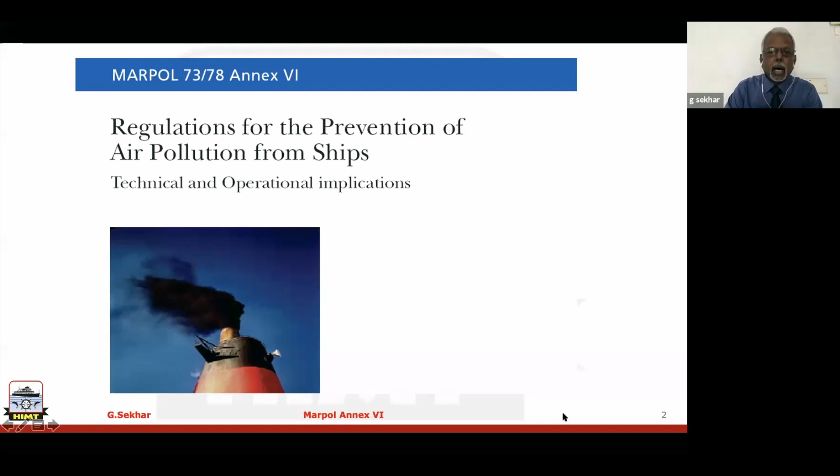But IMO regulations, if you see MARPOL Annex 6, as I have said, the focus is mainly on those issues which are very difficult to solve. For example, look at all these 3 issues, like ozone depletion, global warming, or acid rain. Now, who is responsible and how can we solve this issue? Can you put this responsibility on any one country? Or is the solution that simple?

As you can see, collectively, every country is responsible for these issues. So that is why Annex 6 or IMO regulations look at the problems at macro level, and many guidelines are given for the flag states to follow. Of course, when you are looking at air pollution, IMO is very much confined only to ship-related pollution regulations.

Otherwise, air pollution coming out from trucks and cars, and from power plants and thermal power plants, the black smoke or carbon dioxide coming out, IMO regulations Annex 6, as all of us are aware, focus mainly on ships.

So today in the learning objective, let's go a little more in detail, and we are going to look at the overview of this annex. That means what are the very important regulations addressed. I'm not going to go regulation by regulation, only the highlights where we need to focus. And the next learning objective, the second point, ozone depletion potential, acid rain, global warming potential, which I have already mentioned. And also, it follows with IMO 2020.

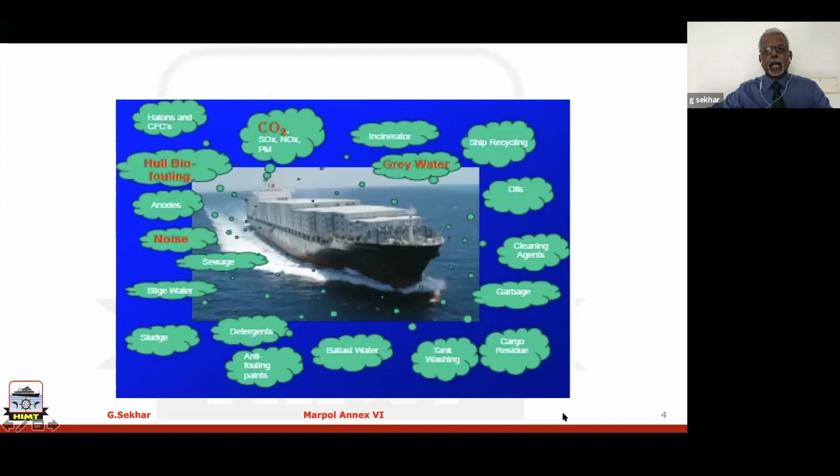Now focusing more on Annex VI, this slide I have taken from the European Union website. Just see the impacts of ships' emissions. They are looking at the health issues of human beings: respiratory effects, cardiovascular, and acid rain. With acid rain, they say loss of flora and fauna.

Acid rain is basically your SOx and NOx, coming out from your diesel engines, generators, auxiliary, main, and boilers. When the ship emits sulfur oxides and nitrogen oxides, they get mixed with the atmospheric air, and eventually when it rains, the pH value becomes a bit acidic. As all of us are aware, pH 7 is neutral, but it is not 7 anymore. They have done studies, and it is less than 7, making it acidic, which has its own issues.

The next one is eutrophication, as you can see there. Then ozone depletion, the ozone layer we have all around the globe at a distance of about, say, 15 to 20 nautical miles. Regarding the hole in the ozone layer, if you look back, in 1987 under the United Nations they had a conference in Montreal. So it is called the Montreal Protocol 1987.

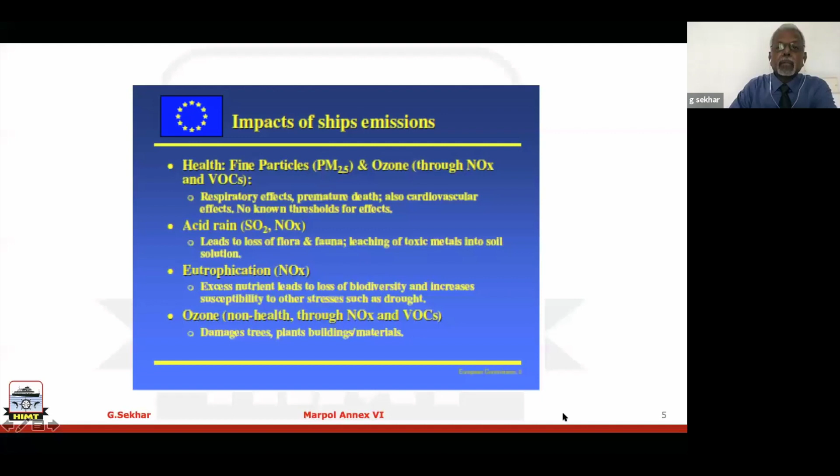In an overview of MARPOL Annex VI, I am just highlighting the important ones which we will discuss during this session, because this session is short, about 50 minutes or so. Like ozone depletion, regulation number 12. What does it say? You shouldn't be using any chlorofluorocarbon. Yes, you all know that is outdated now.

That means now we moved on to hydrochlorofluorocarbon, HCFC, that happens to be your R22. Earlier we had R11, R12. Now R22 is also phased out, and they say by 1st January 2020, that means this year, you stop hydrochlorofluorocarbon also. If you have anything chlorine or chloride related, you are going to have issues with your ozone layer. Depletion of ozone layer we don't want, because it affects the environment.

So what needs to be done now? Switch on to hydrofluorocarbon. I think in my refrigeration session I mentioned it earlier. So it needs to be hydrofluorocarbon. The refrigerants we are having are R134A, 404A, 407C, 410A. So likewise, the refrigerants we have now are blended refrigerant hydrofluorocarbons. That's what regulation 12 talks all about.

And move on to regulation 13. Here it is nitrogen oxides. Now, if you look back till 2012, the focus of MARPOL Annex 6 was basically only on ozone depletion as well as sulfur oxides and nitrogen oxides, or you can call it the ozone depletion issue and the acid rain issue. Only these two issues were focused on in MARPOL Annex 6 till 2012.

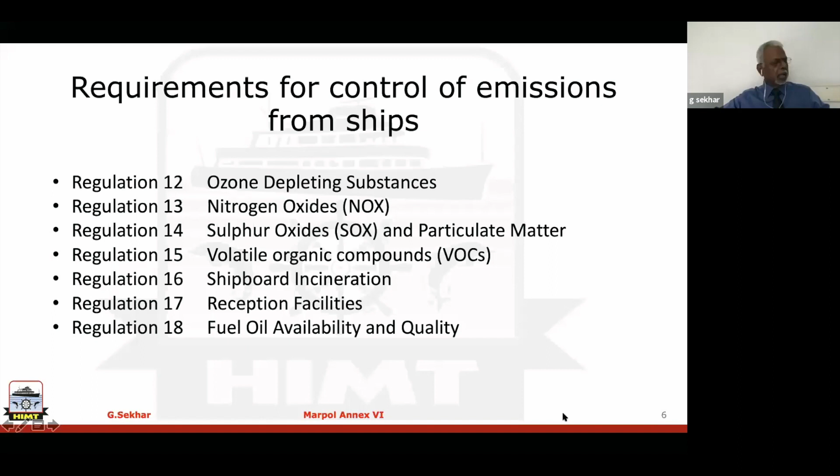Okay. Now, going a little more into your NOx regulation, you are now looking at 2 slides here. On one slide, you see air emission controls. In air emission control, you see 3 different categories: Tier 1, Tier 2, and Tier 3. Tier 1 is a little older one, as you can see, from 1st January 2000 to 1st January 2011. That means any vessel put in service after 1st January 2011, as you can see here, it is actually Tier...

So here if you see Tier 2, the Tier 2 engine is after 1st January 2011. And Tier 3 specifications, as you can see, in Tier 1 it is 17, and Tier 2 from 14.4 to 7.7. Now the same thing written in this slide is put in the form of a graph. That's what you see here.

Now if you see in this graph, on your x-axis you see the rated RPM, and on your y-axis you see the NOx emission in terms of grams per kilowatt hour. Now if you see the black curve here, that happens to be your Tier 1. And the orange color that you see here happens to be Tier 2. That means as of today, all ships delivered after 1st January 2011 should comply with Tier 2.

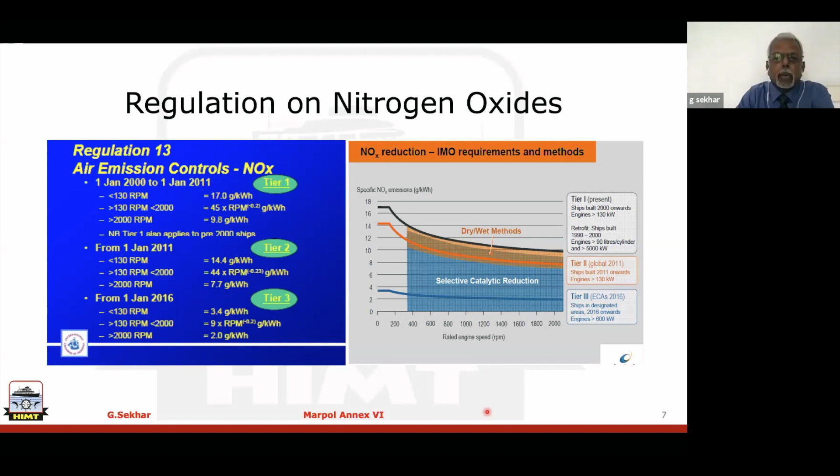So the formation of NOx, if you look at this slide, what I am trying to discuss now is this particular point, residence time. You see this. So the formation of NOx is like this. So how can you control NOx? Coming down from Tier 1 to Tier 2 is not an issue. But going down from Tier 2 to Tier 3, engine makers have to do something; onboard engineers cannot do anything because the engine manufacturer has to bring in something.

From Tier 2 to Tier 3, by primary methods alone, just by engine tuning alone, nothing can be done. You need to have an additional attachment, something like what we usually call selective catalytic reduction or exhaust gas recirculation. Any one of these has to be incorporated in the engine. Then only you will be able to.

That means your emission control area for NOx, which happens to be only North American waters. So whenever you come to the NOx emission control area, the engine has the capability of bringing down the NOx value from 14.4 grams. I am now looking at a main engine of, say, around 90 RPM.

From 14.4 grams per kilowatt hour right down to 3.4 grams per kilowatt hour. How are you going to do that? That means as long as your vessel is in the emission control area, you will be sending your exhaust gases not directly to the atmosphere, but directly to the SCR, and then whatever comes out from the SCR after NOx reduction will be sent into the atmosphere.

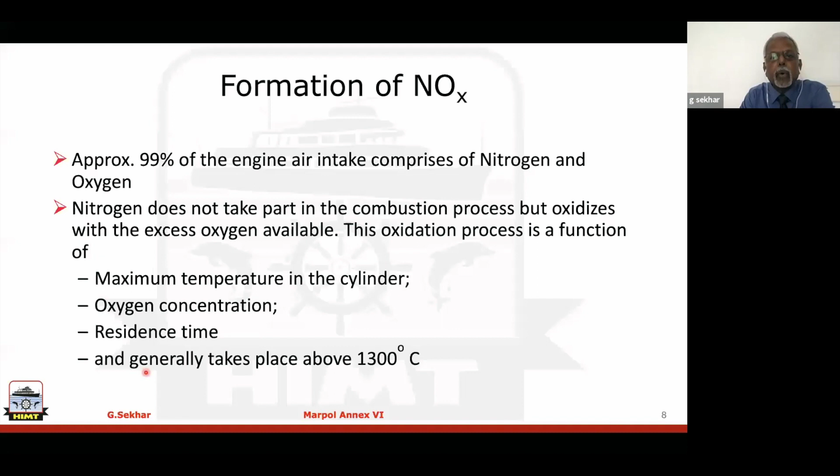Now, you all know that every engine must have an EIAPP; it is a requirement for every engine. And these are all called NOx influencing parameters. That means you need to maintain a NOx technical file, and then any maintenance you do. You see the injection timing. Now the injection timing is, let's say, 8 degrees before TDC. If it is made 9 degrees, it's going to have an effect on NOx. And of course, injection system components.

These components will have an IMO number. Initially when the engine is tested, a certificate is given to the engine, the Engine International Air Pollution Prevention Certificate. And down the line, after 1 year, 2 years, or 5 years, how do we say that the vessel is still in continuous compliance with the required regulation? That is done as per your NOx technical code.

So at any point of time, any component you change, because components will wear down. Let's say after 3,000 hours you'll have to change some component. Maybe some piston ring is broken during decarb and you have changed the piston ring. Anything that you do, you need to make sure that the spare parts procurement is from the engine manufacturer, and you use exactly the same component with the same IMO number.

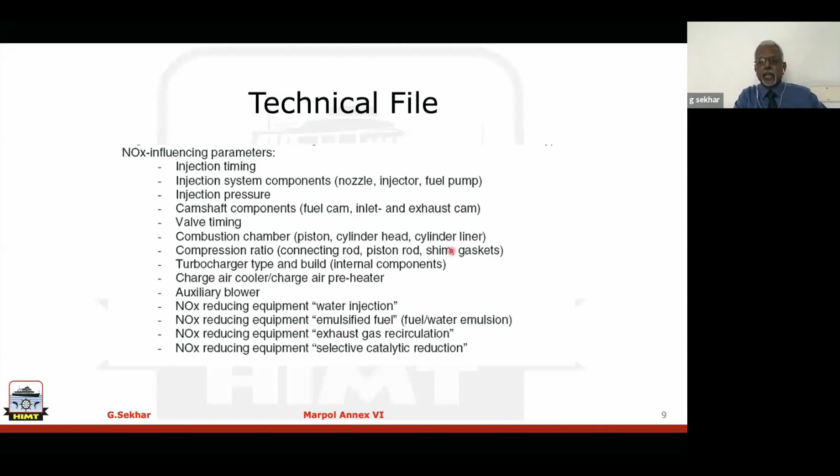And if you see here, apart from the turbocharger, there are timings, as I have said, or even the shims. You see the shim here, compression ratio. Suppose you alter the shim thickness, what will happen? Your clearance volume will change. Then your compression ratio will be affected. So I just wanted to mention this.

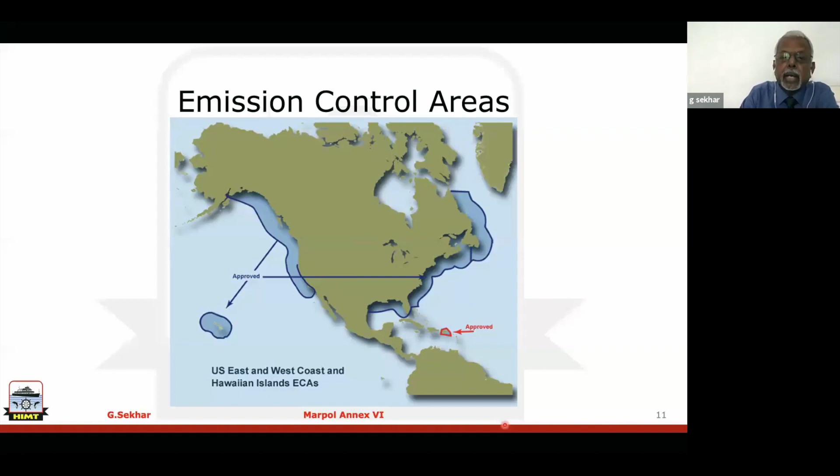As of today, the only NOx emission control area is North American waters. But from 1st January 2021, there is not going to be any more confusion. These SOx emission control areas, SECA areas, are also going to become NOx emission control areas. I hope you are aware of this. From 1st January 2021, MARPOL Annex 6 very clearly tells you that these areas are also going to be NOx emission control areas.

That means there is no specific difference between NOx and SOx emission control areas. It's going to be a single emission control area for both NOx and SOx. Then it's going to be a problem for the ship owners. For example, ships delivered after 2021, because many ships keep coming into this area. Any vessel entering here has to comply with Tier 3 NOx emission controls. For the main engine, it is 3.4, as long as the RPM is less than 130 RPM.

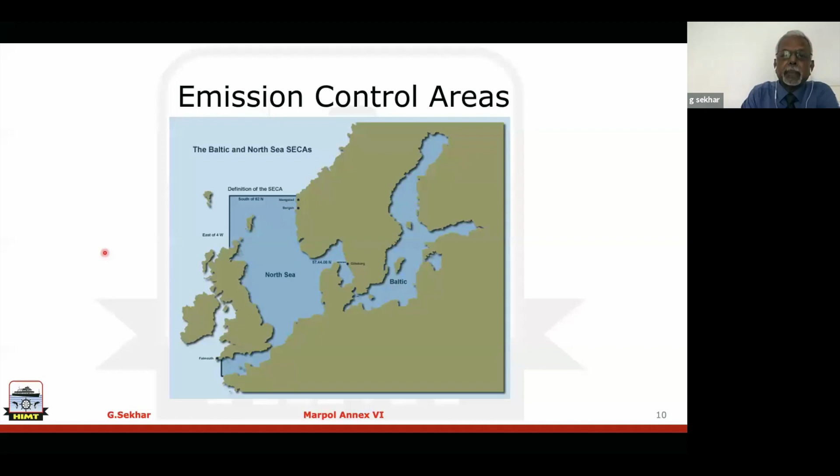So in future, how I'm looking at it, almost all ships will have selective catalytic reduction or exhaust gas recirculation, so that when you go into emission control areas, you come down to Tier 3 limits, and when you come into global areas, you come to Tier 2. That's the reason, right on top of this slide, I've written just emission control areas. This applies both for SOx as well as NOx. I hope it's clear.

Okay, now let's move on to the next regulation, which is about sulfur oxides. Sulfur oxides is very simple. Annex 6, even 10 years back, very clearly told us that from 1st January 2020, switch over to 0.5% sulfur.

Not now. I am talking about 10 years ago, 2008, 2009. At that time itself, it had been told. But then what is the option? Now, either you switch over to 0.5%, that means from 3.5 right down to 0.5. It has already taken place, so I don't want to waste time talking about it, because now we are almost in the first week of April. So all ships have switched over.

Now, in case you don't switch over, what are the options available? See, here I have put compliant combustible media, compliant fuel. That means 0.5% sulfur when you are using. So it's very easy. You use either 0.5% MGO, MDO, or the next one is 0.5% heavy fuel oil blends. Or in case you decide to stick with 3.5, then you need to have a scrubber. Now this is one option.

I'll just highlight this issue a little more. And what is the next option? So these are all the 4 options available for the ship owner. But the last one, where you see the LNG, LPG option, as a retrofit it is not practically possible. It is possible for new ships, yes, but not for existing ships. So for existing ships, either these two, very easy for us to do.

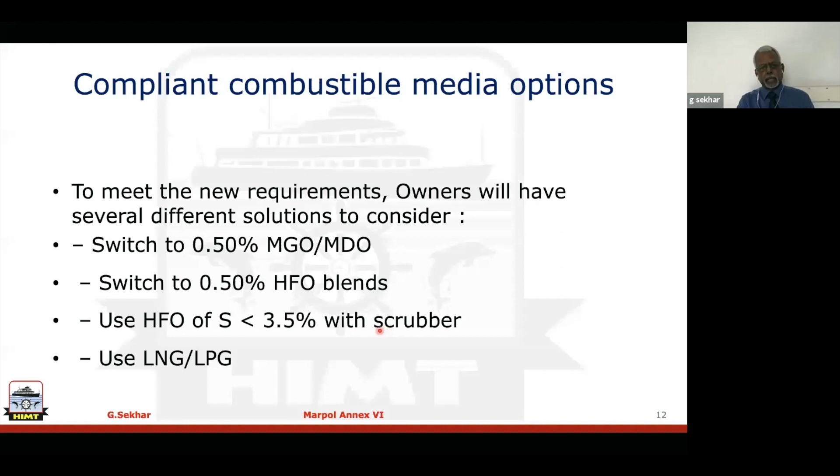Gentlemen, can you keep your mic muted, please? Hello. I request the moderator to mute all the mics except mine, please.

Of course, low viscosity, and lubricity is an issue, because the sulfur present in the fuel, as we understand, gives some sort of a lubricity characteristic. So when you keep reducing the sulfur, say from 3.5 to 0.5, or from 0.5 even further down in MDO, MGO, then the lubricity factor is absent. So if lubricity is absent, what will happen? Look at the wear in the fuel pump between the plunger and barrel, and wherever lubrication is required, it's going to be a problem.

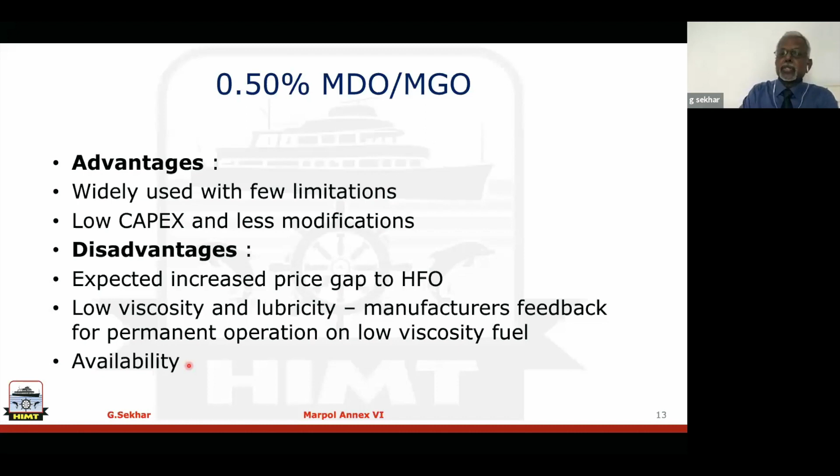So, okay, some additives can be added. So that is an issue. Of course, availability of so much quantum. If every ship owner decides to go on MDO, MGO, how much fuel do you need? So those are the plus and minus points. Now let us look at this.

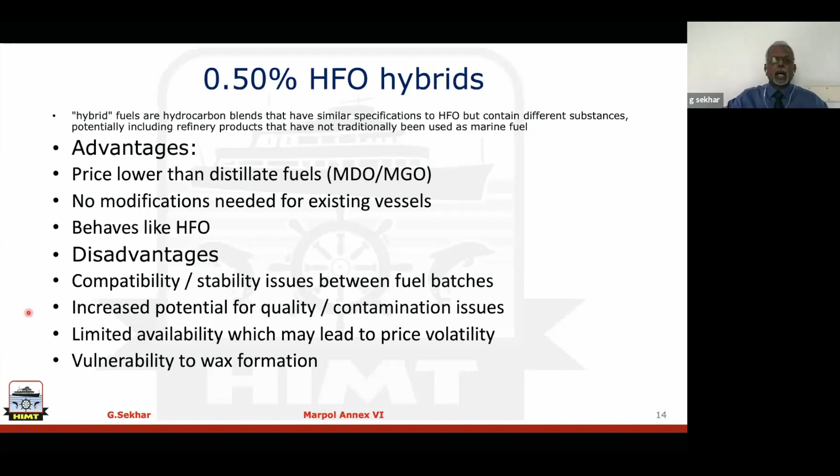But immediately after we changed over, what I understand from my friends who are sitting in the office as superintendents, they tell me things are settling down now. So maybe things will improve. So these are all the HFO issues. Otherwise, the third option is what? You continue with 3.5%, of course, with the scrubber.

Many coastal states have already warned the ship owners not to throw out this effluent coming out from the scrubber into their waters because the water is acidic. So with open loop, that is the biggest disadvantage. Okay, maybe in open ocean you may be able to do that. Of course, closed loop, yes.

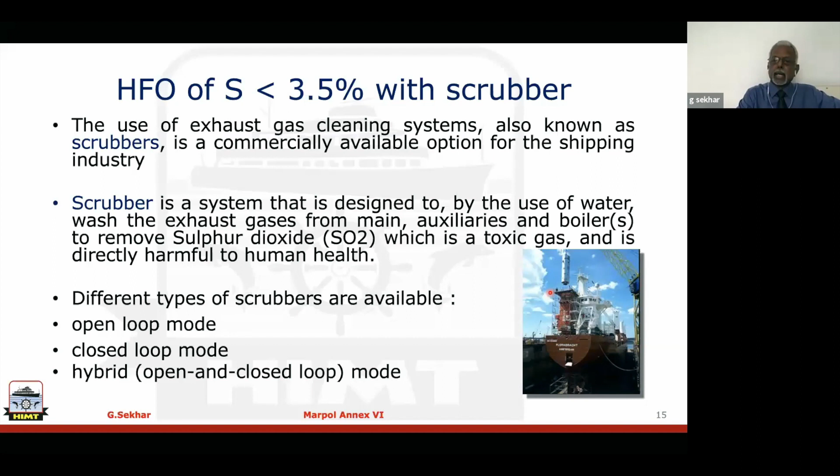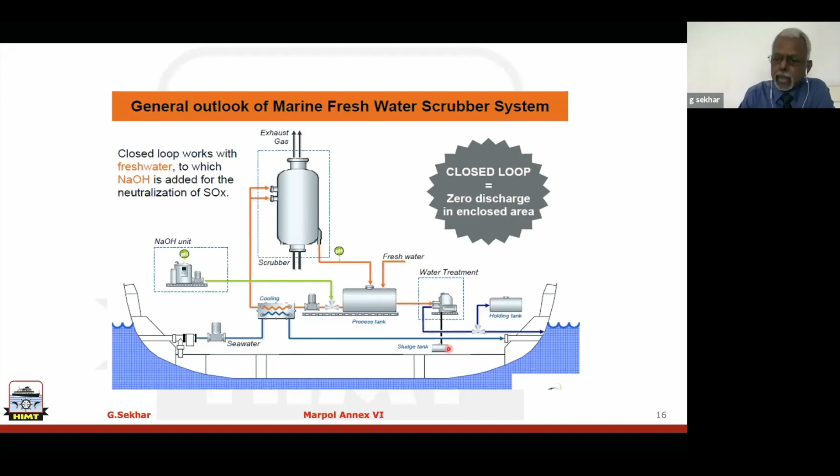So then what needs to be done? From the process tank, you have a water treatment plant, where the sludge is dumped into the sludge tank. Okay, so this is how you can have a closed loop. I just put this slide so that you have an idea how things are.

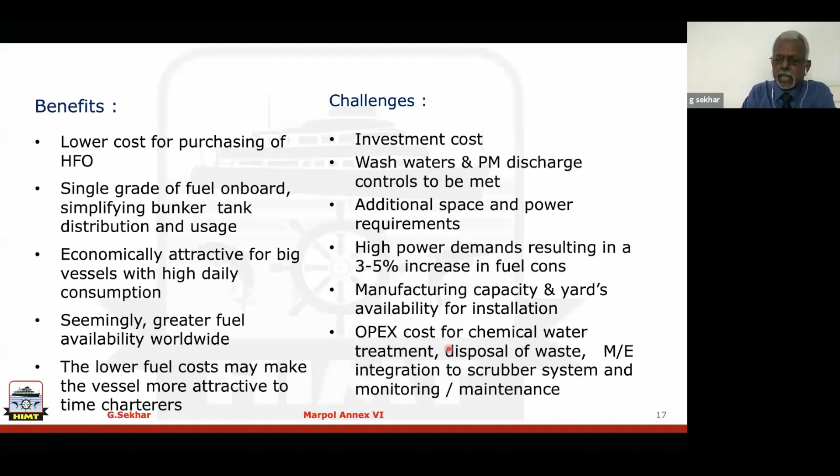Now, if you are looking at the advantages and the disadvantages of this, what are the benefits? Lower cost for purchasing heavy fuel oil, single grade fuel, because as you know, by March of this year, we cannot have any 3.5% sulfur fuel on board if you opt for compliant fuel. So these are the benefits and these are the challenges, which I have already mentioned. Otherwise, switch over to LNG.

LNG switch over, as I have said, as a retrofit is not possible. But for new buildings, of course, there are many ships switching over, I'm talking about bulk carriers, oil tankers and many container ships. Apart from LNG ships, they are switching over to LNG bunkering with an LNG bunker tank, and they have installed dual fuel diesel engines. A couple of ships have already been running for more than a year now. Maybe in a future class I will discuss more on this. So LNG is the option, but not as a retrofit to the existing ship. This one I just wanted to touch.

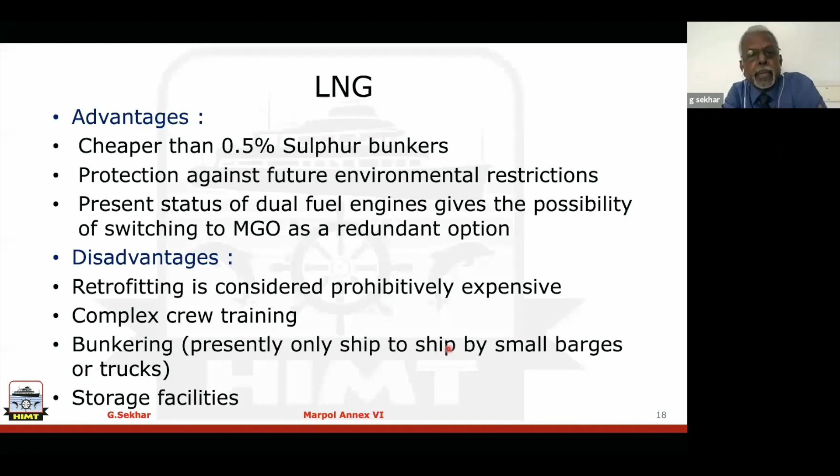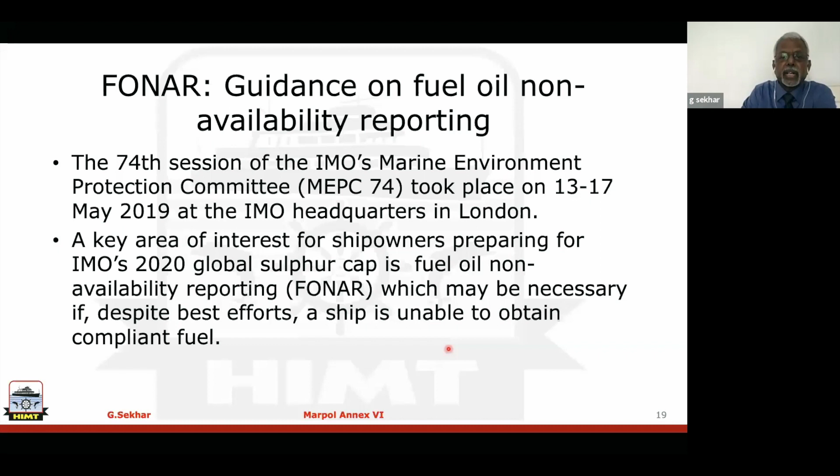Now, FONAR, in case you have this issue, fuel oil non-availability reporting. I think by 1st January 2020 this regulation came. If you have any issue, then you do FONAR, non-availability reporting, to the flag state and all that. These are all the contents of the FONAR. So I thought I'll just put a slide on that for you to have a look at it. You need to give all the details.

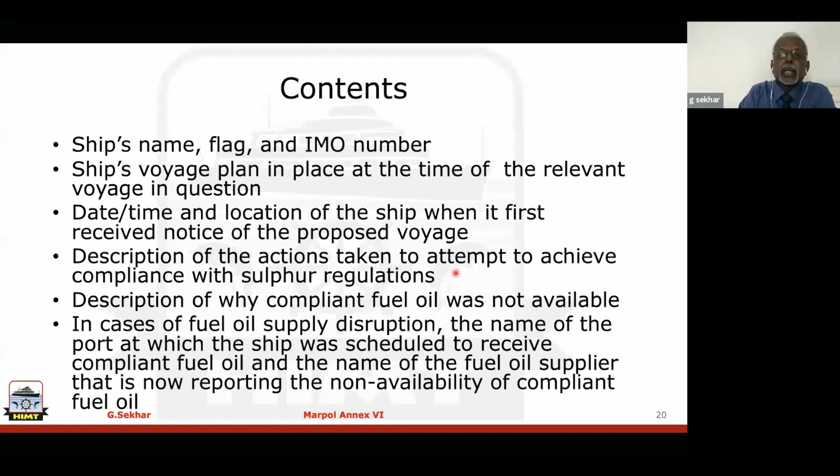Look at the second point: the ship's voyage plan in place at the time, where it received notice of the proposed voyage, what actions were taken to attempt. So these are all the points the ship has to give, and you need to inform the flag state that the non-availability of compliant fuel was mainly because of this. So this is what we call FONAR.

Okay. So far, these are all the regulations which were already there. But the new ones they have brought out in Annex VI are these: Energy Efficiency Design Index and Ship Energy Efficiency Management Plan. And regulation 22A has become mandatory now: collection and reporting of ship fuel oil consumption data, which the ship owner collects on an annual basis from ships above 5,000 gross tonnage and passes on to the flag state. Eventually the flag state has to pass it on to the IMO.

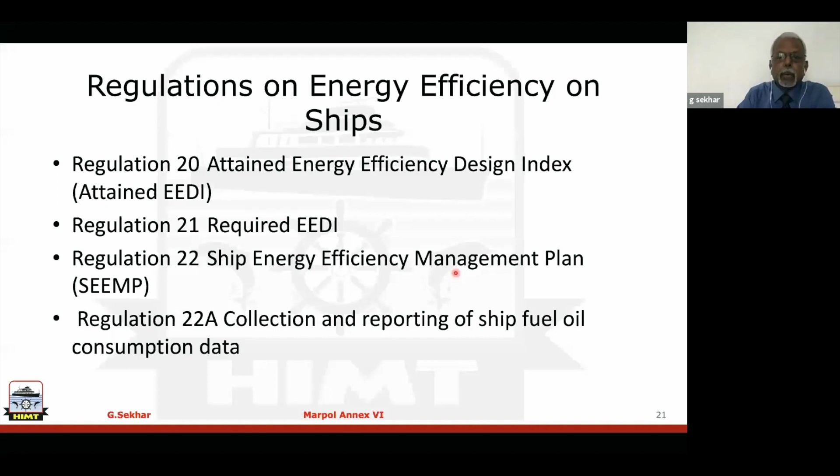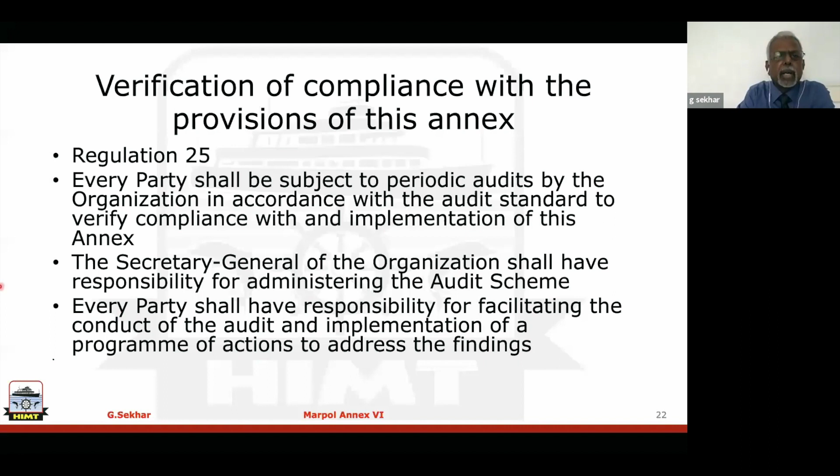As you can see here, for compliance with any of the convention regulations, IMO is directly going to form audit committees, with auditors picked from the flag states. The audit committees will carry out audits of all the flag states as per the plan. As you can see, the Secretary General of IMO is responsible for this audit scheme. So it is more of an auditing of the flag states.

Okay, now focusing more on the issues of global warming. This regulation came in 2013. So what does it say? If your vessel is delivered after 1st July 2015, your vessel has to have an Energy Efficiency Design Index. If the vessel is earlier, before this date, it is not required. So new ships above 400 gross tonnage. And there are two things here: one is attained EEDI and the other one is required EEDI. And also we talk about the Ship Energy Efficiency Management Plan.

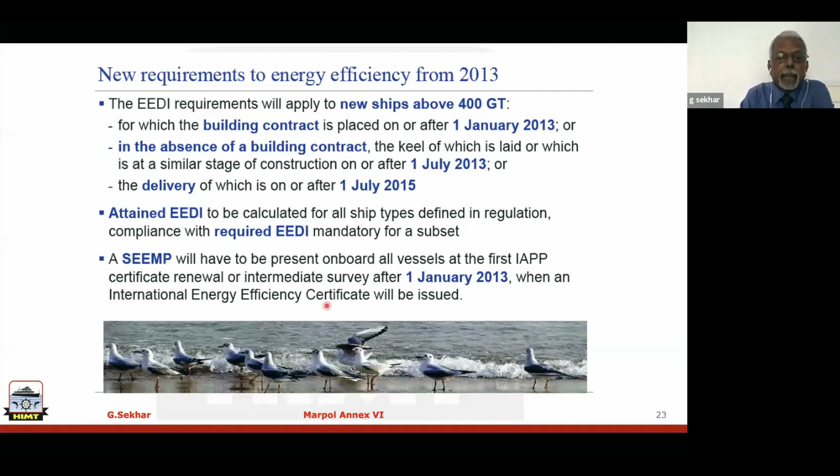So once there is compliance with Chapter 4 of MARPOL Annex VI, where we talk about energy efficiency, an International Energy Efficiency Certificate will be issued. This certificate becomes a mandatory requirement to get your overall IAPP. So now let us understand what EEDI is. EEDI is also known as the Attained Design Carbon Dioxide Index. You can say it is environmental cost divided by benefit for society.

The formula given in Annex VI has been condensed into a very simplified form here for your understanding. These are all conversion factors. Now SFC is specific fuel consumption. Look at a voyage from A to B: how many tons of fuel oil were consumed during the voyage? That has to be taken on one side. And the quantum of cargo transported from A to B: if it is a passenger ship, how many people; if containers, how many TEUs; or any other cargo, how much.

Let us say a VLCC is transporting about 300,000 metric tons of cargo from the Persian Gulf to Australia, a distance of about 4,000 nautical miles. Then how much fuel oil was consumed for this voyage? Use it in the formula. The bottom line is: for transporting 1 metric ton of cargo over 1 nautical mile, how many grams of CO2 have we emitted? The grams of CO2 come from the fuel oil consumption: grams CO2 divided by cargo capacity multiplied by nautical miles. This is how EEDI has to be understood.

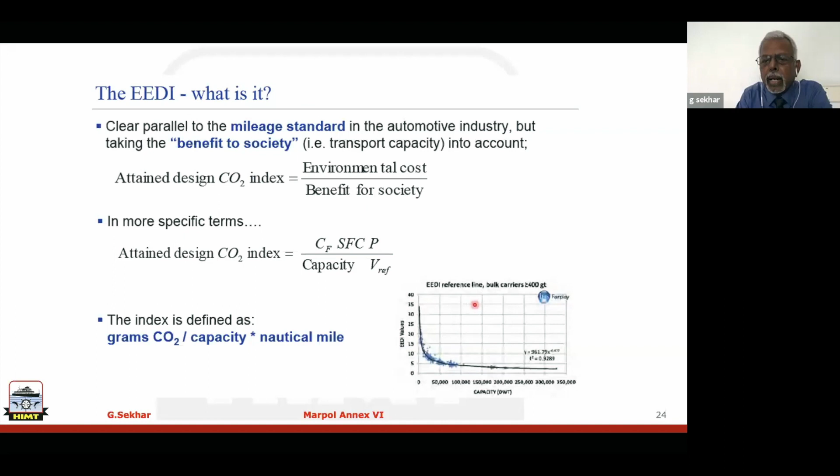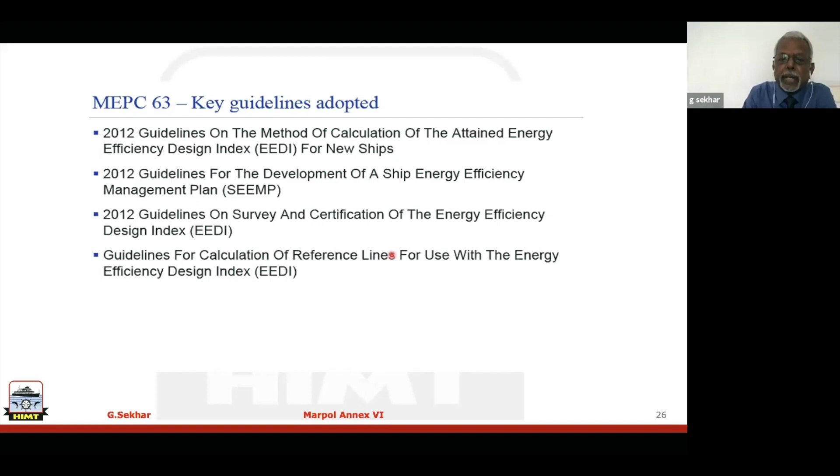If you look at MEPC 63 in more detail, in 2012 itself they gave the calculation of the reference line: how to do it for a bulk carrier, a container ship, a tanker. For every type of ship this reference line is made. Let us say your bulk carrier capacity is about 80,000 tons. This graph is set for bulk carriers, the reference line for bulk carriers of more than 400 gross tons. From 80,000 tons, you go all the way up here and then come back here.

Then what is going to be the EEDI value? It's going to be some 4.2, 4.3, whatever it is. That happens to be the required EEDI. Of course, you need to compare it with the attained. You calculate using the formula given in Annex VI, and your attained EEDI has to be less than the required EEDI.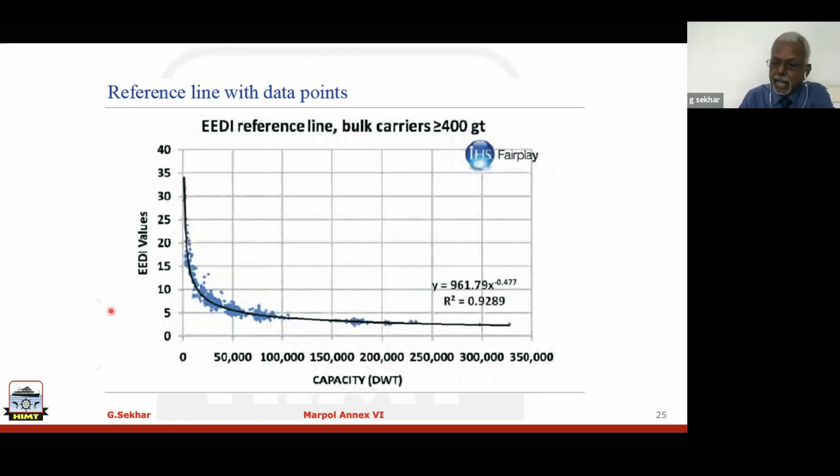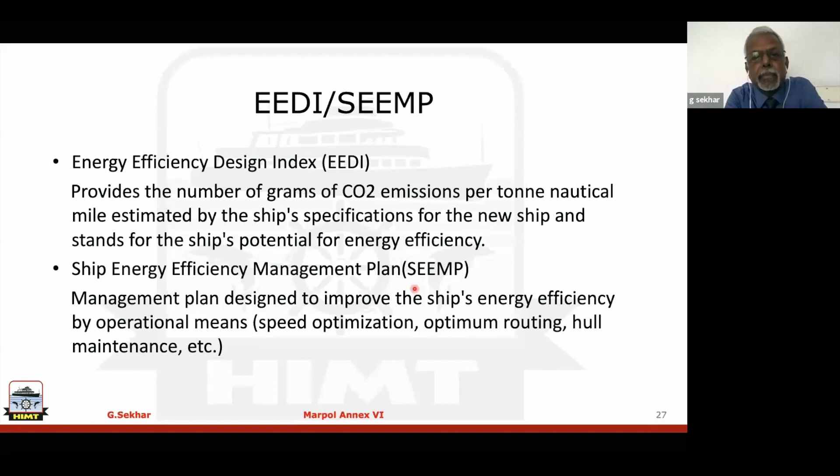Now, that is how your Annex is going on. So, basically, what is EEDI? Again, in a different form: number of grams of CO2 emission per ton nautical mile estimated by the ship specification for the new ship. As I said, ships delivered after 2015. Of course, SEEMP, you are very comfortable. I think SEEMP is required for all types of ships, whether it is existing ship or new ships, whereas EEDI is only for ships after 2015.

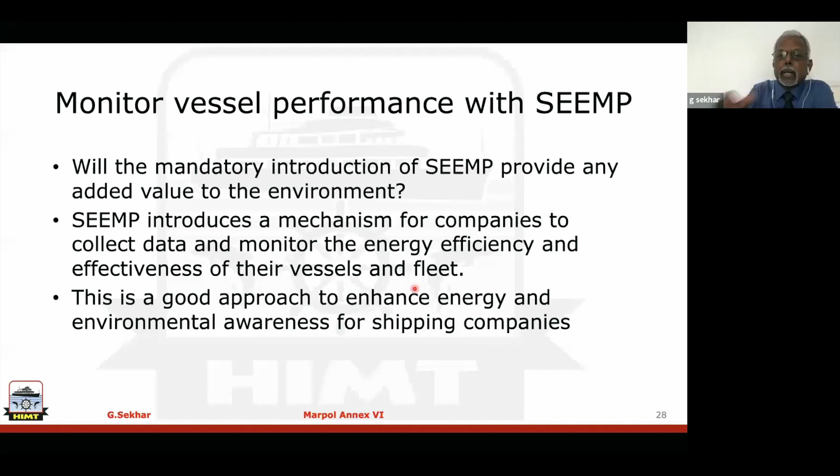So vessel performance is monitored. Your SEEMP introduces a mechanism for companies to collect data and monitor energy efficiency. All that is done. So shipping companies, you are all doing it. There is nothing new here. But energy efficiency operational indexes, basically, this can be done for all types of ships, existing as well as new ships. And this is somewhat like your attained EEDI.

That means, for example, nowadays many ship owners resort to underwater hull cleaning more frequently, say every 6 months. Whereas earlier, ship owners would wait until the ship goes to dry dock, about 1.5 years. What for? We have seen the performance of the engine with reference to fuel consumption before hull cleaning and after hull cleaning. So when you do that, there is going to be a change in the value of your EEOI. So the basic concept is, if you want to optimize your CO2 emission, you need to minimize fuel consumption.

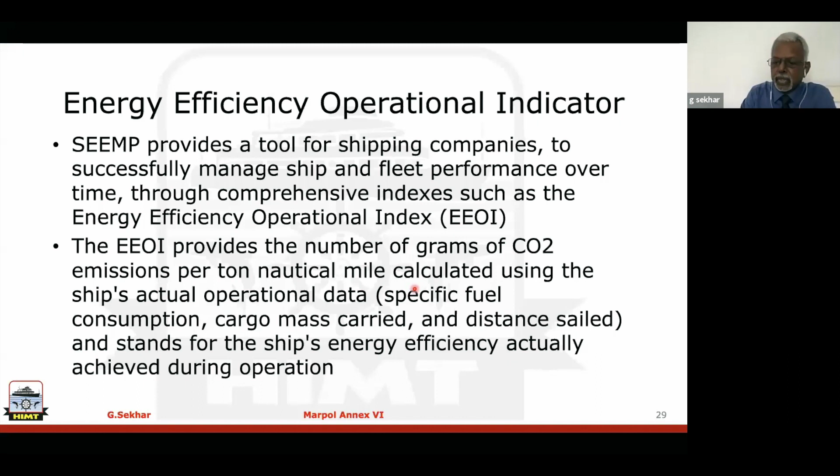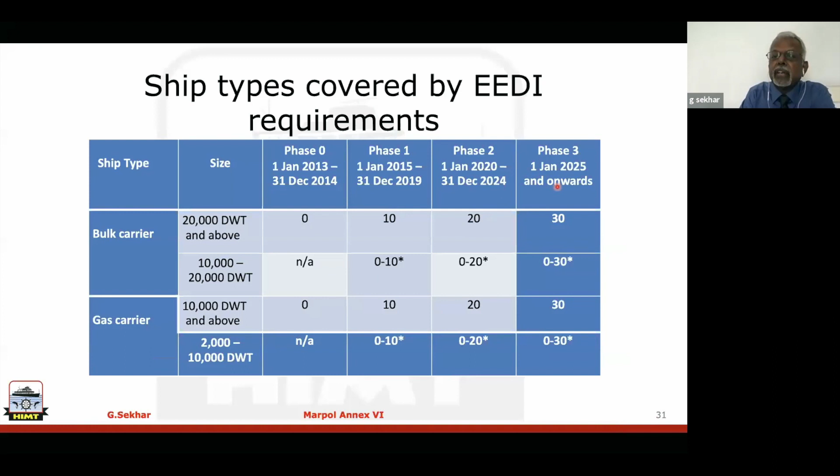But how will you quantify? That is why IMO has brought out this regulation. Any ship above 5,000 gross tonnage needs to collect fuel oil consumption data, which has to be passed on by the ship owner to the flag state, then from the flag state eventually to the IMO. This table gives you an idea. Every phase is 5 years. Phase 2 starts from 1st January 2020, ends with 2025. So another 10%. Whereas from 1st January 2025, phase 3, it's almost 30%. So this is the IMO's plan.

So what can ships do? Regulations aside, MARPOL Annex 6 gives you many guidelines. What other things are ship owners resorting to? Weather routing, all of you understand. And energy consumers on board. Look at the energy consumers, all the motors on board, whether it is a hydraulic motor or...

Mr. Sekhar, sir, this is the moderator. Sorry for the interruption. 8 minutes left, sir. And some questions are raised by candidates. Yeah, let me finish this, then I'll take questions. Okay, sir. Thank you.

So, gentlemen, you can see in this slide: efficient operation, speed optimizing and trim. We do economical speed on many ships. When you reduce the speed, your consumption comes down, and your CO2 emission comes down. And trim: ships like container ships are going down by head now, half meter or 1 meter. And more efficient technology, fuel shift. I mentioned already about LNG ships. When you switch over to natural gas, your CO2 emission comes down by about 30%. Because LNG is CH4, also a hydrocarbon.

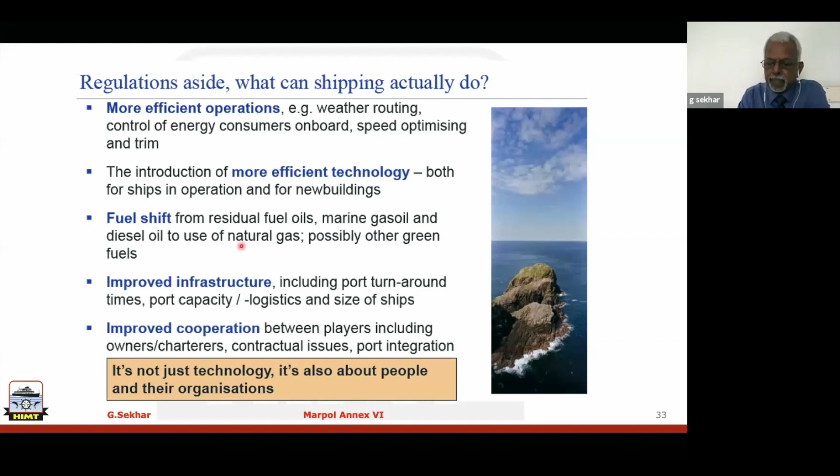So basically, for CO2 emission reduction, the focus should be reduce power demand, ship and propulsion design, and improve efficiency. One is propulsion optimization: propeller designs, number of blades, ducted propeller, contra-rotating propeller. The profile of your bulbous bow is also looked at. And engine technology, electronic engines, where your SFOC goes to the minimum. Waste energy recovery: in some ships, even at the funnel, you have a gas turbine connected to an alternator. And of course, alternate fuel.

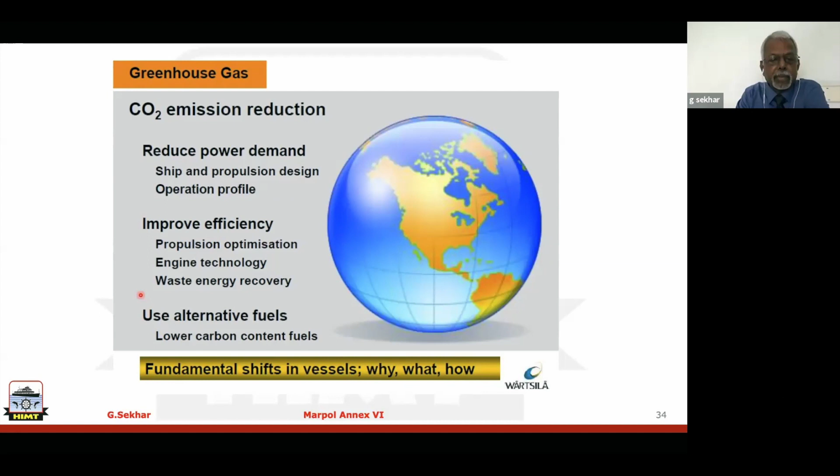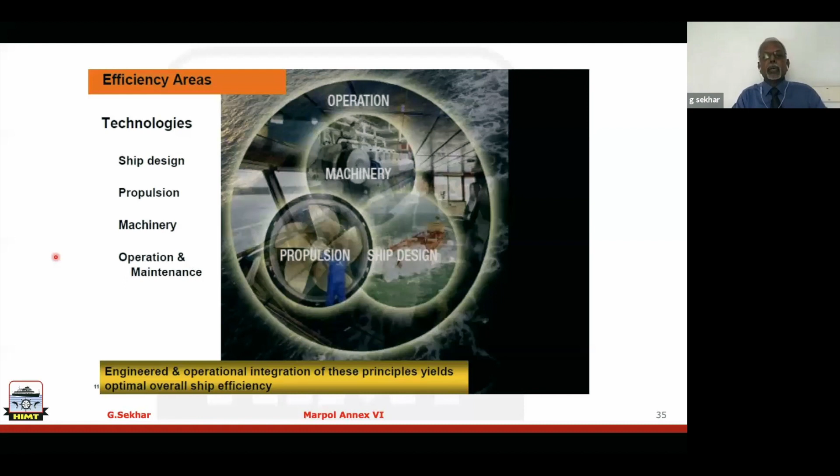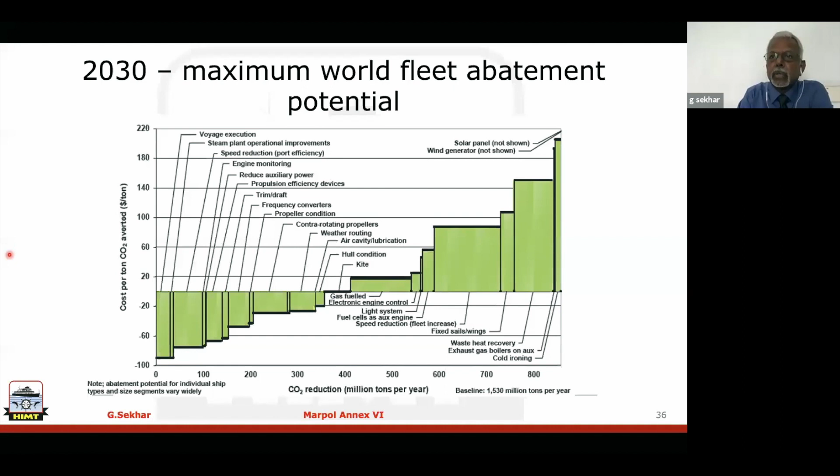Solar panel is not shown. You will find some ships have solar panels, they have wind generators. These are all fuel savings, and waste heat recovery. So there are many things suggested on the slide. Eventually, ship owners are also looking at how to reduce the fuel and how to come within the IMO's target period, so that beyond 2025 there is going to be a reduction of almost 30% of CO2 emission from ships.

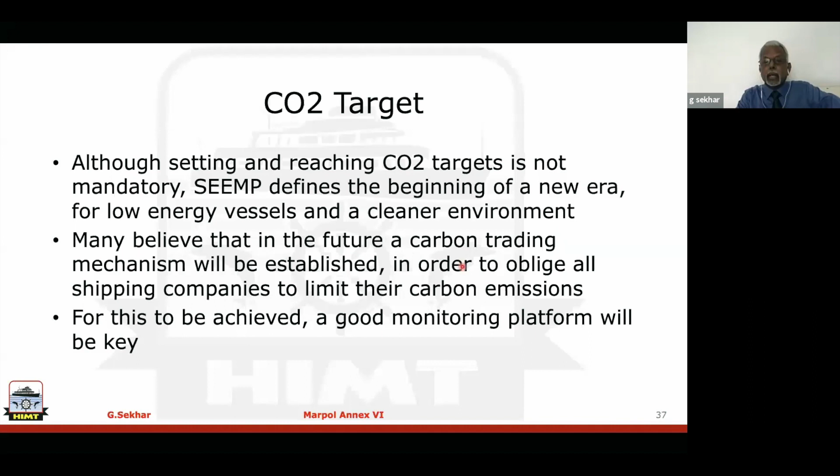And one more thing, if you look at the second point here, a carbon trading mechanism will be established to oblige shipping, to limit their carbon emission. Now, let us understand what this carbon trading business is. This is already in the pipeline, and as of now it has not come. This is basically called the cap and trade mechanism. Cap means setting a limit on the amount of pollutant that can be emitted. Then trade.

Now this is what is called trading. The company which makes 1 megawatt of power without emitting CO2 should get 1 carbon credit from a company which is making 1 megawatt of power and generating CO2. That is the concept. Anyhow, this is in the pipeline. We will see when it comes.

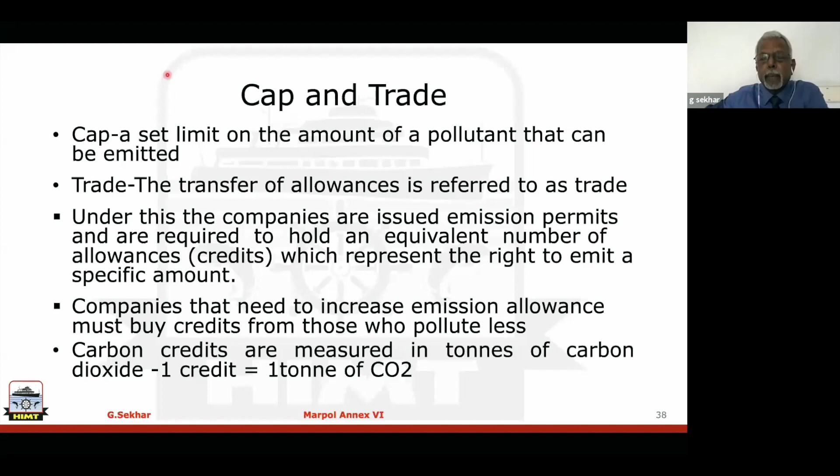But from next year, IMO has already come out with it and it's going to enter into force from 1st January 2020. What is going to happen? All these emission control areas will become one. That means